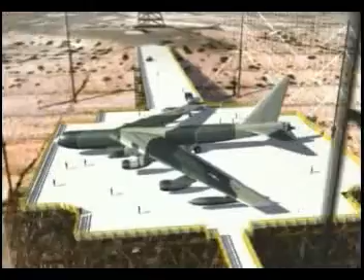Journalist Walter Lippmann first coined it, continued from the end of World War II in 1945 to 1989, when the fall of the Berlin Wall symbolized the end of the conflict. During the time of hostility between Eastern and Western Bloc countries, the United States conducted underground and atmospheric tests, as well as simulations, in order to maintain nuclear superiority over the Soviet Union.

The Cold War was a period of considerable anxiety, anxiety that stemmed in many ways from a combination of fear of an adversary that everybody knew was out there, the Soviet Union, but also anxiety that stemmed from a considerable amount of uncertainty over precisely what was going on in the world and the global environment. Americans, of course, knew that nuclear war would be a horrible thing. It would be terribly destructive and dangerous. But the precise details of it were something that were not really available to them.

How many weapons were we talking about? What were the targets? What would the effects of those weapons be? Under what circumstances might a nation actually use nuclear weapons? All of those things were unavailable to the public because at the time, of course, they were secret. And the fact that they didn't know a lot of those details also made it all the more frightening and raised the level of anxiety.

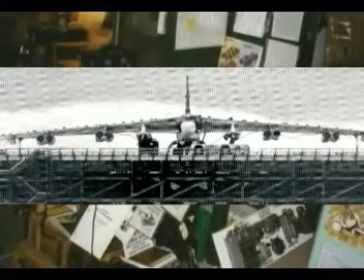Within the nuclear weapons complex, of course, those people had more information about the precise details of nuclear weapons and the possibilities of nuclear war, but they were nevertheless still anxious and uncertain about other matters regarding the competition with the Soviet Union. In particular, they wanted to be very careful to avoid what historians refer to as technological surprise. The fear that some new technology or application could come out of the blue and upset what was regarded as a delicate balance between the United States and the Soviet Union, and provide one side with a considerable advantage.

The last thing you wanted to have happen was for some new technology to come along and catch you unawares or unprepared. And so throughout this period, there was an enormous imperative to explore all of the military technological possibilities that almost anybody could think of, not only because they might be useful militarily for the United States, but also to try to avoid being surprised by the Soviet Union.

It was during open-air nuclear testing that the United States military discovered a destructive byproduct of high-altitude nuclear explosions, or bursts. This discovery was electromagnetic pulse. Electromagnetic pulse, or EMP, is detrimental to electronics and develops when gamma rays from a nuclear explosion interact with the atmosphere. The gamma rays ionize an area of the atmosphere and produce an electric field. EMP currents can reach their peak at faster than 10 nanoseconds and are so incredibly powerful that they can spread at the speed of light.

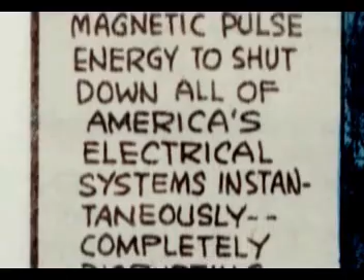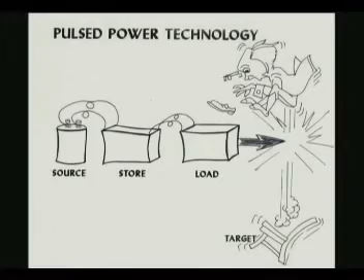In a high-altitude nuclear burst, electromagnetic pulse extends in all directions on the horizon, affecting metallic conductors, including antennas, cables, conduits, power lines, aircraft, and missile bodies. The pulsed conductors then feed the energy into electrical and electronic equipment, burning it out or damaging it. Equipment that operates at low currents, such as computers and solid-state systems that are semiconductor-reliant, would not withstand an EMP power surge. This could result in malfunction of aircraft and other military equipment.

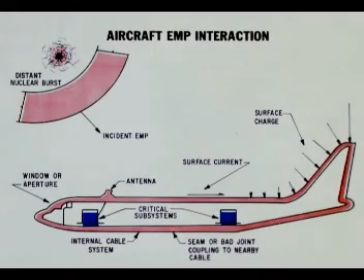It was very important to understand the interaction of this with such systems, because if some class of strategic system had a fault, it's possible that from a high-altitude EMP burst, which can put fields over the entire continent if you do it just right, you could have some Achilles heel. And so we had to understand this so that that couldn't happen. This was particularly important on the strategic equipment, not so much the tactical equipment. And we had to not only solve this problem, but convince the former Soviet Union that in fact we had, so that we were not vulnerable to such an attack.

The first recorded electromagnetic pulse incident occurred during a high-altitude nuclear test in the Marshall Islands. During this detonation, called Starfish Prime, a 1.4 megaton test blast detonated over Johnston Island at an altitude of 248 miles. This detonation resulted in electronic system failure felt as far as Hawaii, more than 800 miles away. Street lights and fuses failed on the island of Oahu, and telephone service was disrupted on the island of Kauai. Owing to this test, it was discovered that if a nuclear detonation took place 200 miles above southern Canada, the EMP effects would cover nearly the entire United States, potentially incapacitating electronics throughout the country.

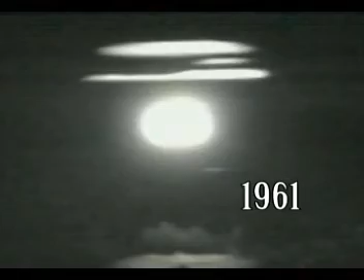Late in 1958, both the United States and the Soviet Union voluntarily suspended nuclear weapons testing. In reaction to a detonation of a nuclear device launched by the Soviets in 1961, the United States made the decision to resume testing and continued until the signing of the Limited Nuclear Test Ban Treaty in 1963.

Although the Limited Nuclear Test Ban Treaty ended nuclear weapons tests or any other nuclear explosion in the atmosphere, outer space, or underwater, underground testing was still permitted. In light of the atmospheric test ban and the continued threat of the Cold War, the United States began to look to simulation methods to determine the effects of nuclear blasts on military material.

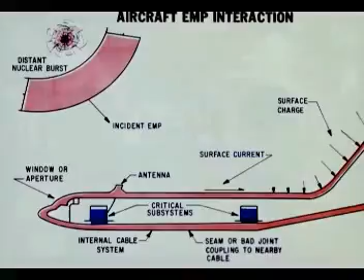Two types of EMP simulation tests were to be created and executed at Kirtland Air Force Base under the direction of the Air Force Special Weapons Center. One test would determine the hardness or functionability of equipment after receiving an electromagnetic pulse, and the other would explore specifically the effects of EMP. Once this information was gained, the Air Force would take measures to harden or protect military equipment so that it could function should it come in contact with electromagnetic pulse as a result of a nuclear detonation.

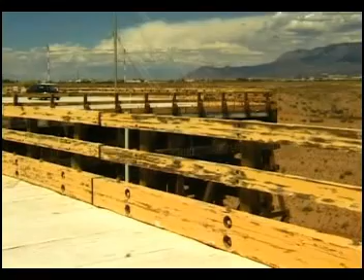During the Cold War, more than 18 EMP simulators were built and utilized in the United States. Many of them were located at Kirtland Air Force Base. These simulators were used to test cruise missiles, aircraft, and other military defense equipment. Although different types of on-ground simulators were already being used for testing, a simulator which tested in-flight EMP had yet to be created. At that time, it was considered critical to have information on how aircraft would respond when struck by EMP while flying.

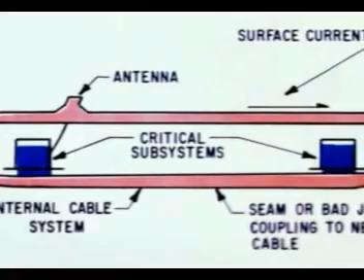We used the testing to verify that the EMP hardening which had been put onto the aircraft was in fact holding up according to specifications, and in almost all cases it was. The few cases where we did find some deviations and needed extra hardening, this was reported to the project office and to the manufacturer so that they could increase the hardening. This was to guarantee that our aircraft could withstand an EMP during a nuclear attack and continue operating in order to defend the United States against the Soviet Union.

In April of 1969, a member of the Air Force Weapons Laboratory's technical staff, Captain Carl Baum, began to look for a way to prove various mathematical models regarding the coupling mechanism between electromagnetic pulse and the inner workings on the aircraft while in flight. Somehow, it would have to be determined whether or not aircraft would survive EMP while flying. To do this, an in-flight electromagnetic pulse simulator would need to be created.

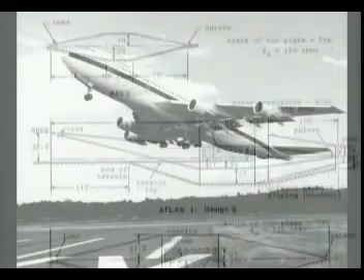If equipment is sitting on the ground, whether it's a parked aircraft, an automobile, whatever, a tank, the thing we're concerned about is the high altitude EMP coming down from space basically, incident on the ground, but there is a reflected wave coming up from the ground. The environment to which the system is subject is those two waves, not one wave, and its close proximity to the ground actually affects its response, or as we might call its Green's function.

For an in-flight configuration, we have essentially one wave coming by because the reflection from the ground comes by much later in time and can be considered a separate event. We already had simulators for both things on the ground and for small in-flight systems like missiles and small fighter aircraft. We needed something for large strategic aircraft, bombers, flying command posts, things like that. And we didn't have such a thing, and that's what led to the design of this simulator.

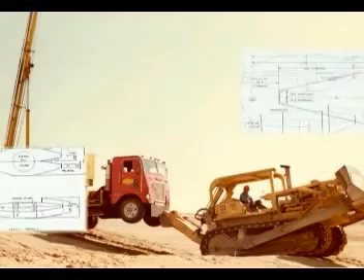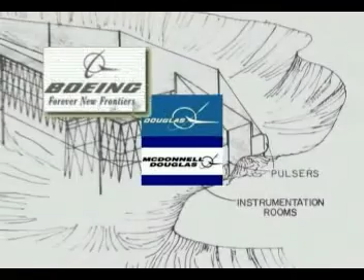During 1973, as design and construction moved forward for EMP simulation testing facilities, the Air Force Weapons Laboratory issued a solicitation for 3 contractors to produce proposals to develop an in-flight simulator. The 3 companies were McDonnell Douglas, Boeing, and General Dynamics. In April of 1973, McDonnell Douglas was awarded the contract.

To resolve the problem of developing a large in-flight testing facility that could support an aircraft, pulsers, and equipment, Dr. Baum suggested the use of a dielectric structure which would support the aircraft well above the ground and avoid electromagnetic coupling between the system being tested and the ground. The basic problem was to get a large, heavy aircraft away from the ground, to allow a horizontally polarized electric field to be incident upon it, and to avoid the problem of the interaction of the aircraft resonances with the ground.

This was a very difficult problem. People were thinking, should we jack the aircraft up in the air? And we're thinking something very large like a Boeing 747, which is much more difficult than a fighter aircraft. In 1969, I wrote the paper which sort of defined the concept of how to do this a different way, in this paper right here. And what it was

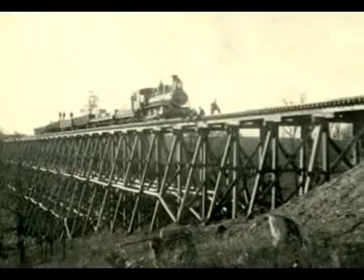remembering some of the old movies about how the Union Pacific Railroad was built coming through the Rocky Mountains from the west. You would tunnel through the mountain, or you would build a large wooden trestle across the canyons that a train would actually drive across. And so I reasoned, if you can drive a train across a canyon, I guess you can drive an airplane across a canyon.

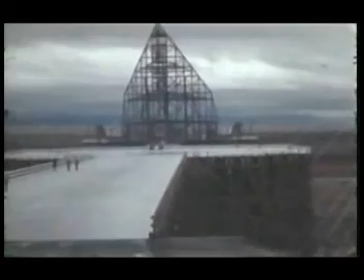The largest horizontal in-flight electromagnetic pulse simulator ever built is the Air Force Weapons Laboratory Transmission Line Aircraft Simulator, or ATLAS. It is commonly known as Trestle because the ramp and test stand have a railroad-like appearance. In order to properly test large aircraft in simulated flight mode, and so as not to create interactivity with electromagnetic pulse, the test stand was created using wood, which is dielectric material. It does not conduct electricity.

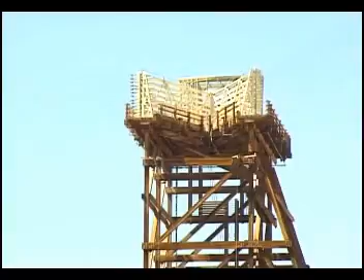Well, for our company, we had done many large projects in our time, and this, of course, was a large project, and of a magnitude that, because of its nature, we had never done this type of project before. Wood systems of the trestle are really unique and are enormously unique.

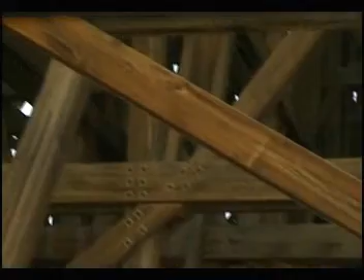Having gone out there this morning and taken a look at what had happened in the intervening 31 years is kind of interesting. And you know, there are 6.5 million board feet in the thing, of glue laminated material, and there are 10,000 connections in the structure. They have split ring connectors and the gusset material. And some of those members, we were looking at some members that were 54 inches deep by 14 inches wide. They had to bring them in on 3 rail cars.

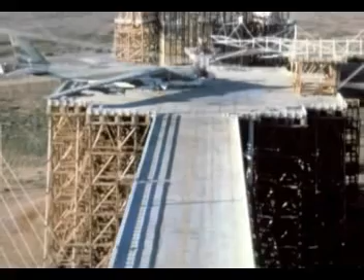To create a simulated flight environment at Trestle, the aircraft needed to be placed on a platform constructed above the ground and of a non-conducting, non-reflective material so that the simulated test would see it as air. Horizontal transmission lines were supported high above the ground. With this configuration, the aircraft could be tested in its normal upright position with the incident electrical field parallel to the largest dimensions of the aircraft, the body, or wings.

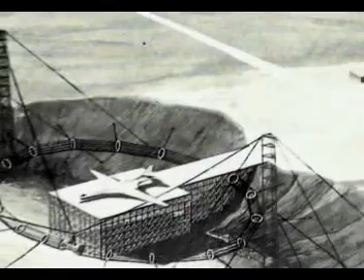Trestle was intended to support the test program with in-flight capabilities and provide an environment with considerably fewer testing limitations than previous simulators. 2 main concepts were considered for the large horizontal in-flight EMP simulator. One option included the torus concept, a huge circular or arched structure extending around and over the earthen bowl created for the trestle structure and held up by a balloon and tethered with cables. In this conceptual design, a high-voltage pulser was located along the arch of the torus.

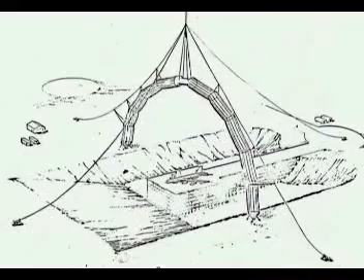Although this design had several advantages, including wide variability of angle of incidence and polarization and unimpeded access to the simulator working volume, the disadvantages outweighed these advantages. The complexity of the operation, because of balloon handling, as well as the requirements for very high-voltage pulsers, made this design less feasible, especially with the threat of high winds.

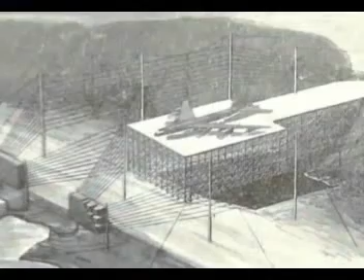The second option was a guided wave simulator that used a large transmission line driven by a high-voltage pulser. This included a conical transmission line extending across a large earth depression with pulsers at one end and a trestle platform extending from the other end into the transmission line.

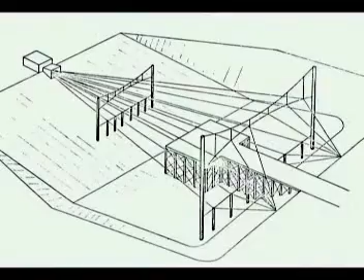The major advantage of the transmission line simulator was that an appreciable fraction of the total energy output of the pulsers was channeled in a preferred direction, so that higher field strength could be obtained in the working volume with less energetic pulsers. The pulsers required to operate such a system were thought to be available at the time. However, the system could not provide the versatility in polarization and propagation direction that the torus design could.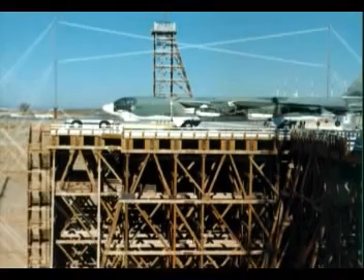Well, the mechanical engineers were mostly concerned about this large wooden trestle. It was a very significant mechanical engineering problem. But its function is to be a test stand to hold the aircraft up. It is not part of the simulator. Its function is really to be invisible to the electromagnetic wave, at least approximately.

The simulator itself is the pulsers, the guiding structure or transmission line, and the terminating resistors at the end. That's the simulator, not the trestle.

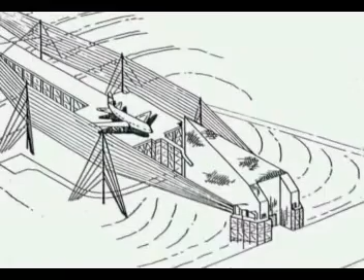As I recall, when I joined Trestle, it was in like September of 1973, and the final design had not been ironed out yet. Our integrating contractor, McDonnell Douglas, MacDac as we called them, they were advocating a glued module design that kind of stacked modules one on top of the other. And we did not care for that design because it was not traditional enough in terms of we needed buildability, constructability. We needed something that the industry was used to.

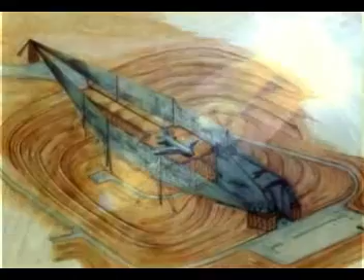The final wooden trestle design was constructed well above grade with a pulse-producing system that would create an electromagnetic wave. The wood selected for construction was glue-laminated western larch and Douglas fir, or glulam. The structure was built in an arroyo, an area where the ground naturally drops off. The area was then graded to create a bowl.

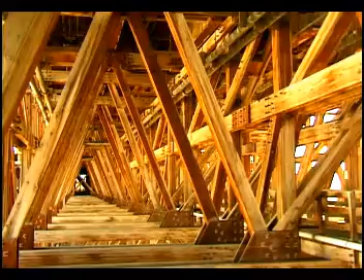The wood, more specifically the glue laminated wood, allowed us to achieve more homogeneity with the structure than if we would just work with the rough sawn or finish four-side material that was not glulam, because what we could do is engineer certain properties into the members that we could use to carry the loads.

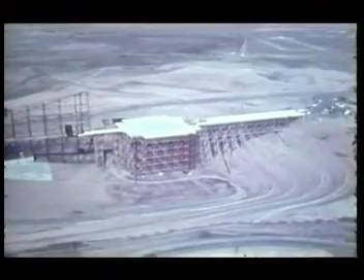And so the basic idea was not to get the plane away from the ground, but get the ground away from the plane. And so you moved out to a location where the ground naturally had that contour, it required very little earth moving by comparison, and you drove it out on this trestle, the ground having been removed by nature for the most part. Building the structure across the arroyo bowl, which ran from north to south, allowed a towing ramp for the aircraft to be moved into position on the test stand.

Transmission lines surrounded the trestle platform and carried electromagnetic pulse from the pulsers located on either side of the central ground plane wedge to the terminator located at the north end of the ramp. The central ground plane wedge, located at the south end of the structure, held the shielded control room and offices. The wire mesh-covered steel structure rising from the building served as a portion of the transmission line. The wedge was the control center for trestle operations.

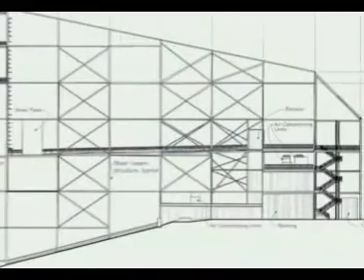It had 4 levels, each served by an elevator and 2 outside stairways. The first and second levels are enclosed to provide habitable office space, storage, and work areas. The third and fourth levels are semi-protected from both the weather and electric field environments. The fourth level was called the pulser level, and personnel were excluded from this level in the area immediately adjacent to the 2 pulsers during firing operations.

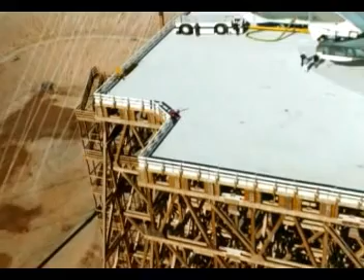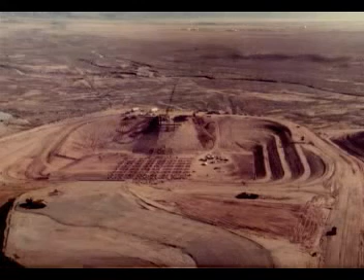The width from the bowl, rim to rim, is 600 feet, which is the length of 2 football fields. The bowl itself is 120 feet deep. The transmission tower is 185 feet tall with 68 feet of glue-laminated wood. The wedge length is 250 feet long and 240 feet high. The ramp is 50 feet by 400 feet and 12 feet up to 115 feet high.

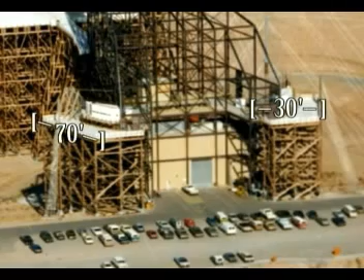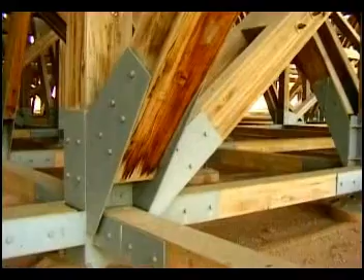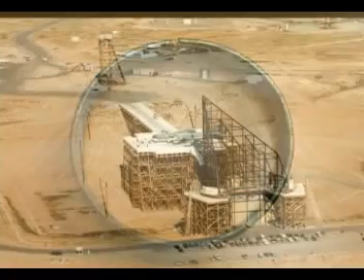The 2 pulsar supports are 30 feet by 70 feet by 74 feet high. The tower power poles are 26 inches by 26 inches by 68 feet high. There are 6.4 million board feet of glue-laminated wood. There are 12,000 square feet of gusset plates, 10,000 joints, 60,000 dielectric bolts, and 120,000 split rings and shear plates. The length from wedge to terminator is 1,300 feet, or 4 football fields. The trestle is the largest EMP simulator and wooden structure in the world.

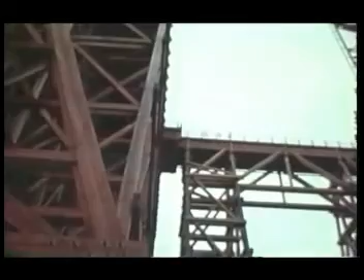According to William Shover, the original Trestle budget was $25.4 million. The final cost of Trestle totaled almost $60 million. Bob Krause was the structural engineer who designed Trestle. The structural design was completed by R.D. Krause Engineering in Santa Fe, New Mexico, and W.C. Kruger and Associates in Albuquerque, New Mexico, under a subcontract with McDonnell Douglas Aircraft Company.

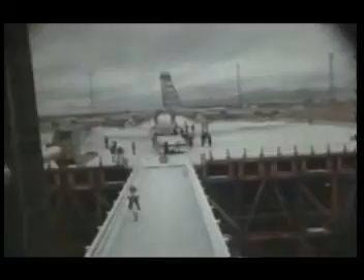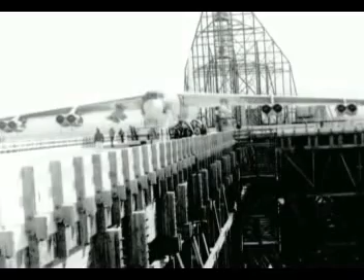Originally, Trestle was to be composed of individual wood truss columns. The final design was more of a standard trestle bent, with braces interconnecting the structure throughout. The bent structure was designed to withstand a wind load capacity of 40 miles per hour with an aircraft sitting on the test stand. Trestle alone could withstand a wind load capacity of up to 100 miles per hour.

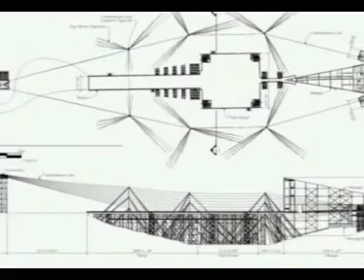I knew that this was a gigantic structure, and it was really involved, and that everything that we did, we would have to think big, because everything was big in size and quantity in putting this project together. Being a structural engineer on the project required research in every phase of engineering. A lot of it was very basic and new. Research such as the wood species going into the glue lams, to the laminated gussets, bolts, and so forth.

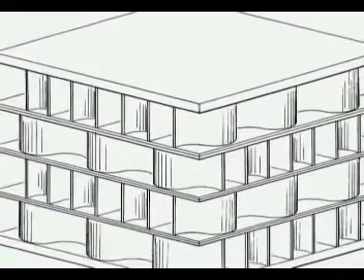The deck for the test stand and ramp were originally designed using a corrugated method. Ultimately, both structures were constructed of glue-laminated wooden beams. The deck planks are 37.5 inches by 15 inches by 52 feet long, consisting of 4 edge laminations. They were manufactured with an edge gap tolerance of no more than 1/4 of an inch. Wood Lam Incorporated of Tacoma, Washington, fabricated the beams, which were then inspected.

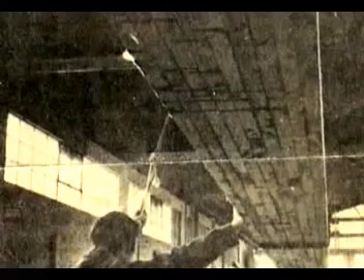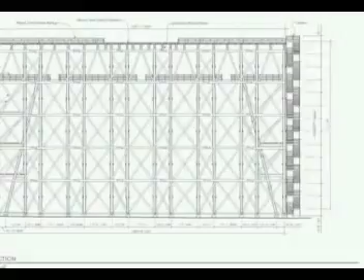The treated glue-laminated members were shipped by rail directly to the construction site. The beams were so big it took 3 railway cars to get them to the site. Weighing 20 tons each, the beams had a cross-section measuring 40.5 inches by 31.5 inches, and each incorporates 20,000 board feet of Douglas fir and western larch lumber. 2 large cranes lifted the beams off the railway cars and loaded them onto a segmented truck bed to move them into place for construction.

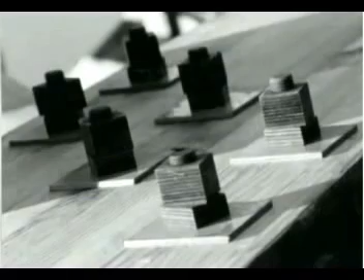The Air Force determined that bolts should be used for the joint connectors of the trestle. Engineers began to evaluate how these connections should be made. A method was developed using split ring connectors and dielectric bolts. Split ring connectors are ring-shaped metal inserts that collect the load from one timber member and transfer it to another. A ring is split so that it can be fitted into a circular groove on the meeting face of each

timber. The groove is slightly larger in diameter than the split ring, and the split of the ring opens when the ring is sprung into the groove. The gap that is created at the split may open or close as the wood expands and contracts based on its moisture content. This ensures that the metal ring and wood are always in contact. Some of the bolts were 70 inches long and the diameter of a broom handle. The undertaking of the construction of the trestle was as large as the structure itself.

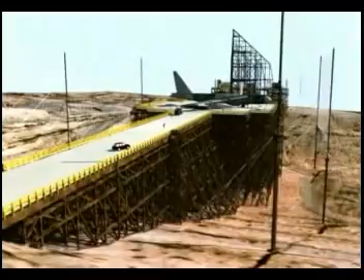The specification timeline for use of this facility was set at least 10 years. The original initial operating capability dates were to be July and November of 1975, respectively, to accommodate a simulated in-flight testing of the E-4, known as the National Emergency Airborne Command Post, or Flying White House. The Defense Systems Acquisition Review Council 3 used the E-4 tests to plan their decision about production. Although the facility was designed to test the E-4, the aircraft was never actually tested at Trestle. Simulation testing began in 1980 with the testing of the B-52.

The Trestle development program included military and civilian staff members as well as consultants to support the engineering analysis for the design of Trestle and review of the work completed by McDonnell Douglas Aircraft and its design consultants. The primary subcontractors under the McDonnell Douglas Aircraft contract were Maxwell Laboratories for pulser design and construction, Braddock, Dunn and McDonald for electromagnetic analysis, timing, and control equipment, W.C. Kruger and Associates for mechanical and engineering design, R.D. Krause Engineering Company for structural engineering. At the end of the McDonnell Douglas contract, the Allen Campbell Company was hired to construct the wood test stand and ramp.

And there were countless structural engineering firms in New Mexico and throughout the United States that were capable of doing this work probably better than I could. But since I snuck in piggyback on W.C. Kruger, I was happy to have the job. And during the design of the project, I probably employed 5 or 6 of my people full time. I only had a total of 13 people in the firm. In total, more than 39 different companies provided consulting, labor, or materials to help create Trestle.

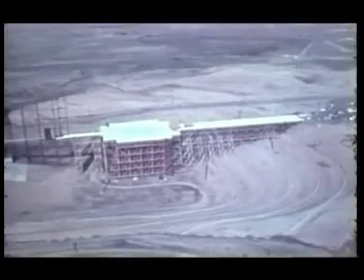I didn't do it all by myself. I couldn't have. I worked with the finest bunch of engineers and scientists you could want to work with, and they were dedicated to the Trestle to make it a reality. Most notably, I'd like to mention Bob Slater, Ted Morelli, John Unvarsky, Bob Rocker, Doug Merkel, and our consultants Doug Stadelman, Don Neal, and Wilbur Birchler, and others, that I really should commit to this history because they really made it happen. And I wish I could remember everybody, but I can't do that.

In the final analysis, the Trestle project was just incidental to my association with people like Bob and Ted and the others. We had a tiger by the tail, but it was fun. And I think I got more out of the Trestle project than I gave to the Trestle. I guess the structure as it stands out there is just a tangible testament to our collective gifts and abilities.

That's great. It took 7 years from the groundbreaking in 1973 to the first test of a B-52 aircraft in 1980 using the EMP test simulator called Trestle. Before testing could take place, safety procedures were developed and a fire protection system was installed. The wooden structure could burn for 4 hours before it would lose any of its structural integrity.

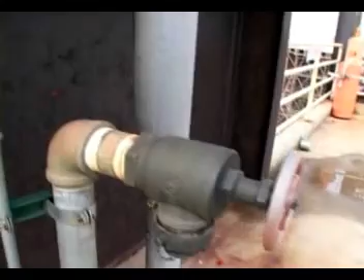The planned fire protection equipment was installed at Trestle prior to testing any aircraft to reduce risk to aircraft and personnel. The minimum quantity of water for the system was 8,000 gallons per minute for a period of 1 hour, which required a storage tank of 500,000 gallons. The average fire hydrant pumps around 1,000 gallons per minute.

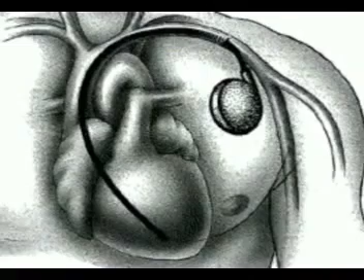In order to ensure human safety, the Air Force Weapons Lab developed safety procedures specific to the EMP facilities to ensure personnel would not be harmed by EMP testing. Civilian personnel were excluded from areas in which exposure exceeded 50 kilovolts per meter. Military personnel exposure was not supposed to exceed 100 kilovolts per meter. It had been shown that relatively low EMP field levels could cause cardiac pacemakers to malfunction, although the effect was less severe during single pulse than repetitive pulse operations.

No injuries resulting in death occurred either in the building or testing of the Trestle. The most dangerous part of the operations was the handling of the aircraft, when we were moving the aircraft and when we were running engines on the aircraft. And at that time we had a full-time safety officer and all the employees were briefed on safety procedures.

And we had an Air Force crew standing by who was used to handling the aircraft and would place the employees when we were running engines and keep everyone out of the way when we were running engines. We always had a fire truck standing by anytime we had engines running in case there was a fire, which there never was. We never had to use them.

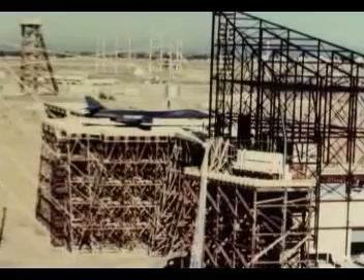Once the aircraft was on the test stand, EMP simulation at Trestle was produced by rapidly switching a high-voltage, high-energy pulse from the pulsers onto the transmission lines. A warning sounded and flashing lights were set into motion prior to the initiation of the test. The Marx generators were charged for 2 minutes, and on command the pulser discharged into the transmission line. The antenna then radiated an electromagnetic wave in a similar manner to a radio wave.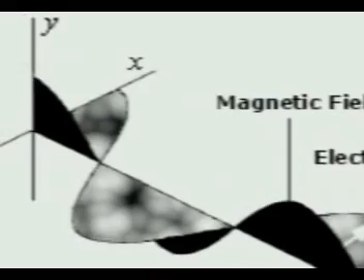The pulses created during a test were of nanosecond duration, and although there were millions of volts, the pulse itself did not have a visual characteristic. There were no flashes, blasts, or shocks, but there was a small sound due to the discharge from the main output switches, similar to the sound of a muffled .22 caliber rifle. The greatest effect that could be noticed was a click on an audio circuit.

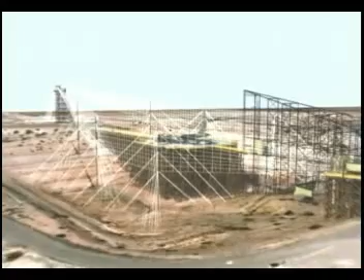Aircraft test programs at Trestle ranged from 3 to 6 months, with a standard 5-day work week and second shifts as required. During times when no testing was taking place, there were 25 administrative crew members at Trestle. Approximately 50 additional personnel arrived on site to conduct the tests and worked from trailers.

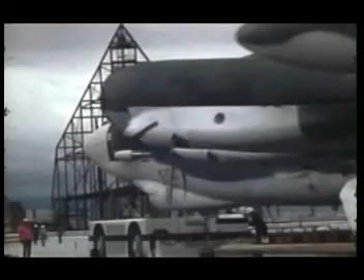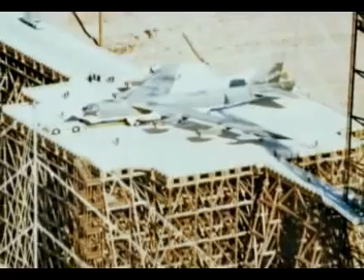To begin a test, the aircraft was instrumented at specified locations to monitor the electrical response. It was then towed along the ramp to the test stand and was positioned in the orientation required for the test. Test orientations included moving the pulse across the aircraft from nose to tail, tail to nose, wingtip to wingtip, or at an angle in between. Once the aircraft was in the testing volume with the proper test orientation, the final monitoring instrumentation was added.

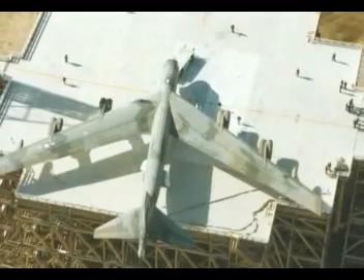In the first checkout test on March 1, 1980, a B-52 was towed onto the ramp and into the testing position. An electromagnetic pulse struck the B-52 as a wave and entered through the communication antenna, cockpit windows, ground access doors, as well as diffusing through the decking. The solid-state devices that were not hardened against electromagnetic pulse were burned out, or their operation was upset by interference with computer memory and navigational aids.

The following aircraft were tested using the Trestle horizontal electromagnetic pulse simulator: the B-52, the B-1, and the TACAMO. The main aircraft that we were trying to test for EMP hardness was the heavy bombers and the cruise missile carriers, because this was our primary defense against the Soviet threat. We also tested helicopters, including the President's helicopter, as well as fighter aircraft such as the F-16, the F-14, the F-18, and other Navy aircraft.

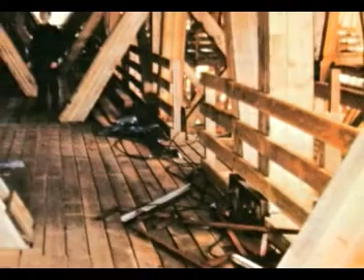At the end of the Cold War, the Air Force Weapons Laboratory requested a plan to maintain the Trestle simulator in inactive status, with the idea of potentially reactivating testing. However, there were significant impacts in keeping the Trestle dormant at baseline operability. Deterioration from lack of maintenance. It took as many as 6 employees just to maintain the Trestle wood systems.

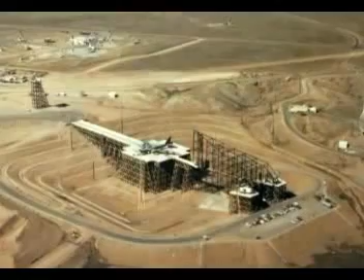Increased test startup time. Increased cost to ready the facility for testing. Increased equipment failures. Conducting a new wood study analysis to ensure safety. Loss of personnel with Trestle expertise requiring extensive training of new hires. Lowered pulser reliability. Lowered rates of data acquisition. Ultimately, the decision was made to discontinue maintenance of the Trestle simulator and other simulators around the nation. The Trestle would be allowed to deteriorate without further maintenance or repair.

The last test on the Trestle of a strategic bomber was the B-1, which was tested in 1989. After that time, we were still maintaining the Trestle platform in anticipation of the next strategic aircraft that was to be tested in the early 90s, which was the B-2 stealth bomber.

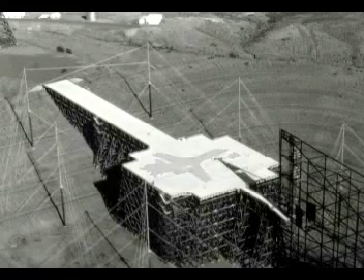However, with the fall of the Soviet Union, the DoD de-emphasized any further nuclear testing of any kind, and the funding that was supporting the maintenance of the Trestle and the Trestle platform was reallocated somewhere else, and for us the money went away. Since 1994, the Trestle platform has not been maintained.

I point out that the Atlas I and other EMP simulators, this just being the biggest one ever, were a vital part of the Cold War. They provided us with vital information for protecting our strategic systems. Equally important, they demonstrated to the world, and the Soviet Union in particular, that the United States was seriously addressing the EMP problem. Now, with the end of the Cold War, these are in disuse. The date of the last EMP simulation test was 1988, and the Trestle has not been used since 1990. Thus, the Air Force began historical documentation in order to record the importance of the Trestle and its significance during the Cold War.

And the EMP Trestle, I mean, it's an interesting story. It's one of those somewhat lower key stories in nuclear weapons research in general. Right? When we think of nuclear weapons tests, we think of the large mushroom clouds and the tests out in the Pacific or at the Nevada test site and these huge explosions. And here was this somewhat more exotic effect that was identified early on, but not really explored until much later in the Cold War period during the 1970s.

Later in 2002, I had the opportunity to visit Kharkov, Ukraine, part of the former Soviet Union. There is where they actually developed the EMP simulators and shipped them to other parts of the Soviet Union. They showed me through their facilities and showed me the papers, my papers, and we had some serious discussions, and we felt that this time it was really the end of the EMP Cold War, and we're all friends now.

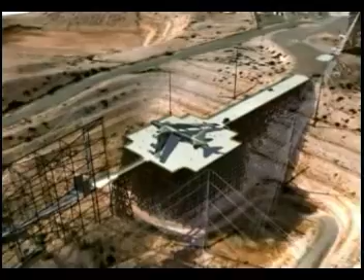Simulators like the Trestle gave the United States scientific challenge and valuable information, resulting in the improvement of military aircraft and equipment.